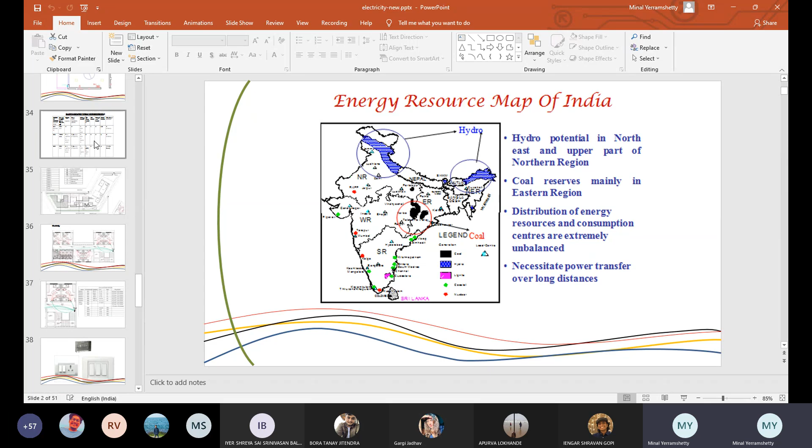So what will you do? You will mention the light as per the... can you see my screen? One minute, yes, one minute, I'll directly go to the plan. And the plan is this. Can you see the plan now? Yeah, I'll go full screen.

Okay, yeah, so you see this? What all things are they showing? Now see here, here he hasn't given any name. Now how will you tell that guy that I don't want L3?

He will say which L3 is it, there's no name here. By something, you want to break the pattern and go some different way, and you just call up your electrical guy. You're sitting in your office and you call him up and say remove L3. Where is L3? I don't know.

So A is the light's position. B is the naming of the light. For the naming, I will probably use... one second, let me go into presenter mode so I can use my pen. My control button is gone.

So if there are tube lights, I will say T1, or TB1 also. If you use LED, you can write L1, L2, L3. If you are using bulbs, you would say B1, B2, B3. If you are using CFL, you can say C1, C2, C3. If you are using sodium halogen, you can say SH1, 2, 3, 4, 5, whatever. If you are using mercury vapor, say M1, M2, M3. This is how you would differentiate.

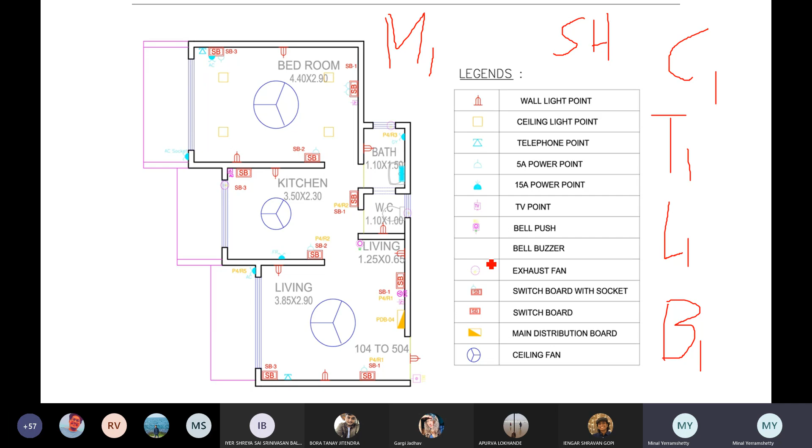It automatically makes sense to you, but does the other person understand what is L, what is C, what is T? He doesn't know, because every architect has a different language.

So what you need to do is make a legend and write it down. L1 is LED, and in LED you get a thousand types of lights now. Some of you can use a cluster, some can use just single points, some can use a cluster of 5, someone will say 7, someone will say 9. I don't know, you have to specify. So just saying LED does not work - it needs the specification, like B1 LED, whatever 40 watt, 60 watt, 100 watt, with specification.

So that's what I'm saying - if you look at an electrical sheet, it is only legends. Whatever language you speak, it is only legend. So one was the position of the light, second was the naming of the light, third one is the dimension of the light.

So how will you dimension it? You will make the center line of this light, and you will give me y, and you will give me x. This is how you will dimension.

Now suppose this is in the center of the wall. If this was on the ground, it's easy for me to mark it out - I can just measure it with a tape. But imagine, now you are talking about the ceiling. The guy is on a stool, he doesn't fly around like that. He will have to move his stool here and there and everywhere, so it's very difficult, tedious and tiresome. Their hands literally hurt - they complain about that.

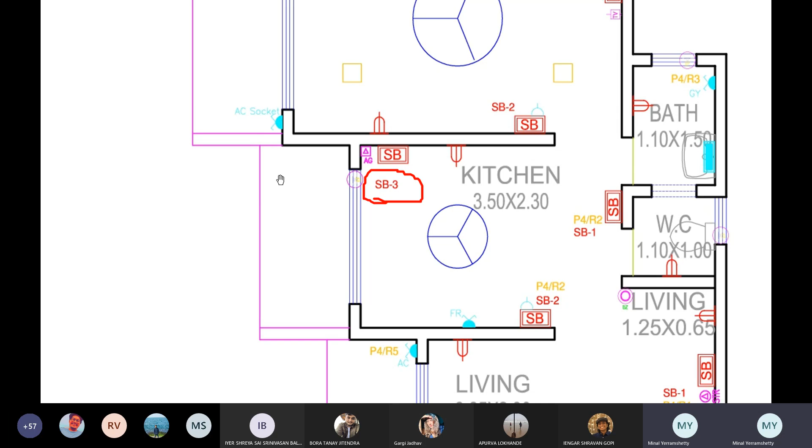So this means you will have to show me SB1, SB2, SB3. You will have to show MDB in your case, since it's institutional - MDB will be in your meter room, the main distribution board, from where the lines will be taken. And since it's an institution, you will have 2 DBs - distribution boards. Now, just as you take care with water lines, you will see to it that the distribution board lines are handled properly.

We will try to put UG and OHT together so that my pipelines become fewer, for various reasons, okay? I don't want to waste electricity or have time lag or whatever. Similarly, I will try to do the same thing in electricity, and we all know the longer the run of electricity, the more the chances it will get heated up.

And that's where your fuse and all your protective gears will come into the picture. So the best part is keep the minimum run. So if your DB is here, the run should be minimum. That's how even he will plan it.

Imagine a person will take the wiring like this, and this way. If the point is here, obviously this was the only option. But if he has to go here, and from here if I take it like this, that will be far shorter than going the other way. Believe me guys, they will do like this for various reasons. He will charge you for the shorter route, and he will actually put it shorter, but he will charge you as if it was the longer path.

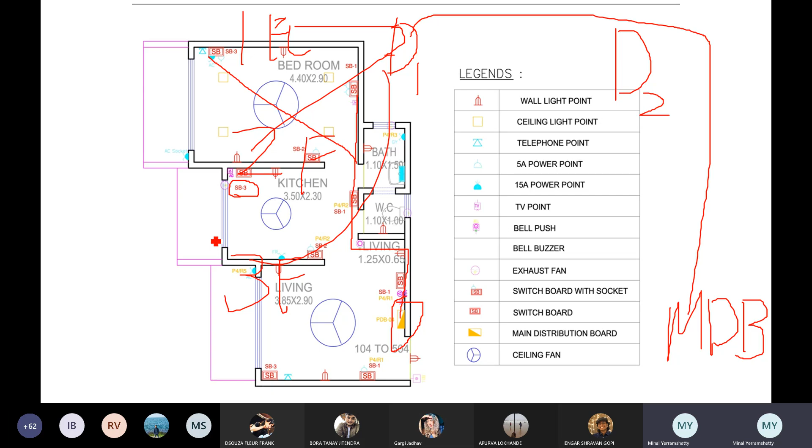So ideally, if I have D1, D2, I will give one like this, one like this. And if there is a third floor, then I'll give one like this. That's how I distribute my electricity, just to protect my wires from heating up. Longer the run, higher the heat. Simple—that's how I increase the voltage.

But can I do the increased voltage within a house? No way. I don't have that possibility. I need a substation for that, which we don't have in a house or an institution, right?

So when we do high-rise building electricity in the final year, there we will study why high tension cables are brought into the site, why you need a transformer, why you need a substation or a generator facility, and then how the entire thing works. We'll cover that in the next semester when we do the high-rise advanced building services.

So this is fine, okay? So this is all done now. Now that guy doesn't know what this means, okay?

Whatever symbols you have used for the light, okay, so the legend of the symbols will also be required. So the easiest way is you can put another line here and say L1 and use different symbols—L1 is this, C1 is this, F1 is this, whatever it is. That way you can minimize the number of legends that you have.

This could be another way of doing it, or best is you give another table which lists all the names—these are the symbols, these are the names, okay? That way two legends are formed, right? The third dimension becomes D. E is the distance of how you place the SB on the wall—where do you put it, right? And I already explained that in the lecture.

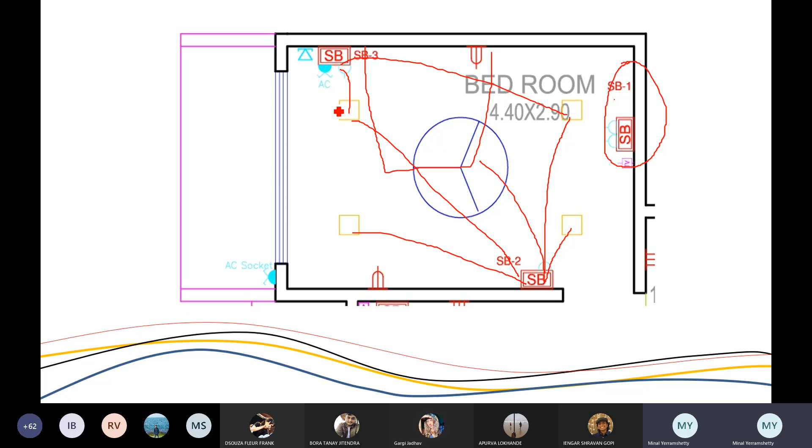1 into 2-way, and 2-way means that this plan is also connected. So when the person wants, he's sitting here or maybe watching or sitting in an armchair, we don't know where the bed is exactly - here or here - because there is nothing shown here. Now suppose the bed is on this side because here there's a 1-way switch and a 2-way switch. Suppose the bed is like this, with this here. While sleeping, he can put it off and the things can go out. So something like this he must have thought about when he suggested all this.

So that's how, again, there are 5 ampere points in the SB. But he has not shown either one 5 ampere point. You can see faint blue line.

Another thing I would like to point out is electricity by itself is very tiny, so when you do the drawings they are exaggerated. We definitely want to show that the agenda of the drawing is not the walls and the beams and everything. The agenda of the drawing is to show those tiny switchboards, those tiny symbols that you have done, but do the symbols in a way that they stand out.

Again, yes. Sorry, I just want to ask - so in our switchboards for our auditoriums, we'll have the lobby and we'll have the auditorium, right? Yeah, so lobby will have one centralized.

You can have only auditorium, or you can do both. If you are interested, you can do the whole auditorium. But in that, either case, it's an institutional space, so it's not like we leave the switchboard out for the public to access, right? Yes, exactly. Lighting of the lobby will probably be in the manager's office, and then the ticket counter and the kitchen will have their own sort of switchboards. Exactly, and the audi's control room will have it too, right?

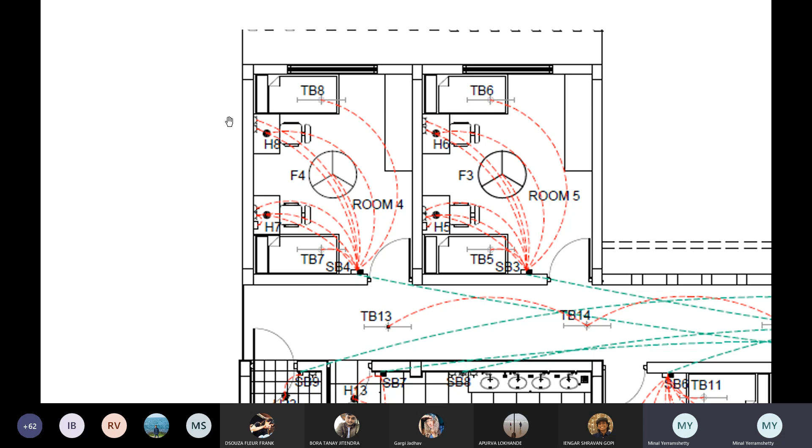Ideally, so I'll show you the next plan. Now look here, this is actually external. I want to show you this plan. I'll zoom in on this area. This is actually how it is to be shown, not the previous one - see the naming of TB7, H7, F4, TB8, room 4. The table is not in this one, one second - I think the table is in the next one, yeah. So then he has done room 1, then he has zoomed in, just to give this table. So look at the way the person has taken the effort to make it understand to the faculty.

Similarly, you will have to do it to your contractor. This was at a larger level where it was difficult for everyone to see and read, because imagine this is one sheet. So then what he did was he had taken this and taken out only that area, and he has actually taken room 1. So room 1 is here, let's zoom in there.

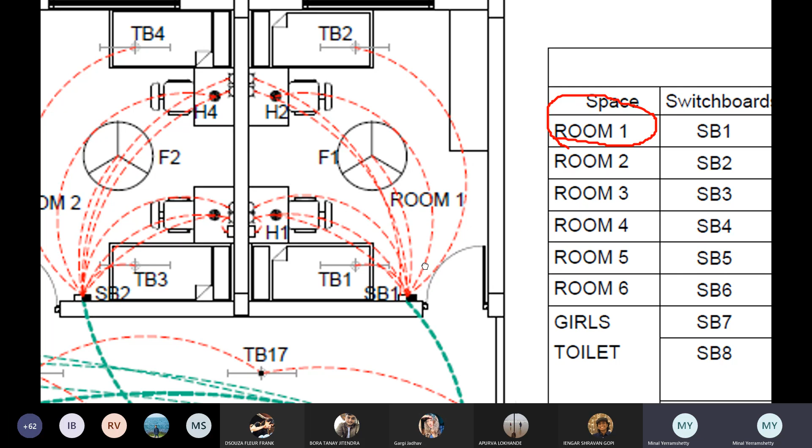Now in room 1, see what is there, TB2. TB2 is connected to SB1. TB1 is connected to SB1. So what he's saying here is, see tube lights, switchboard. He has given tube lights, CFLs, fans, plug points.

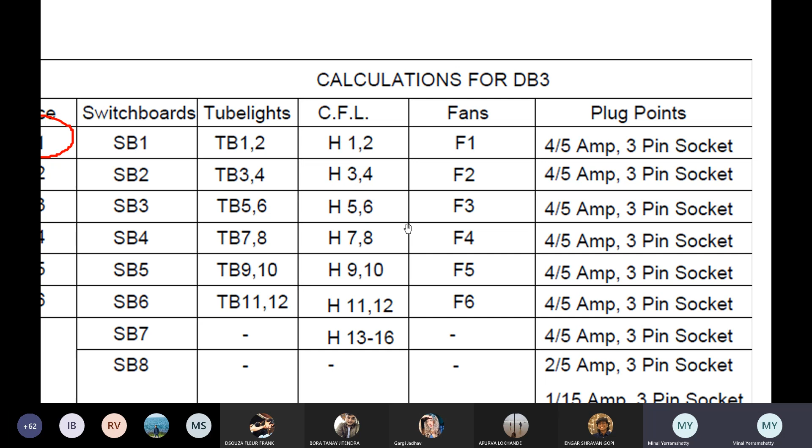Suppose you have 3 kinds of light, you will make one more table. Now why do I do this? What is the need? I can say, in this lights, I can make this, right here TB1, CFL1, switchboard mein hai, SB1 ko ye sare connected.

The problem is, guys, when the project is very large, even if it is a small interior project, say about a 3-bedroom hall kitchen interior, you will have to give a budget to your client, or something that he can order, because either you are ordering, or probably your contractor is ordering. You don't know who is doing that. Whoever is doing it, you have to make their life easy.

So if you do segregation like this, it is easy for me to place order. How many TB will come, 1 2 3 4 5 6, both rooms need 6, and if there are repeated rooms, multiply one room by this and I'm done. So that's how, actually not 6, 1 2 3 4 5 6, so it's 12, so I will have 12 TB in all this area.

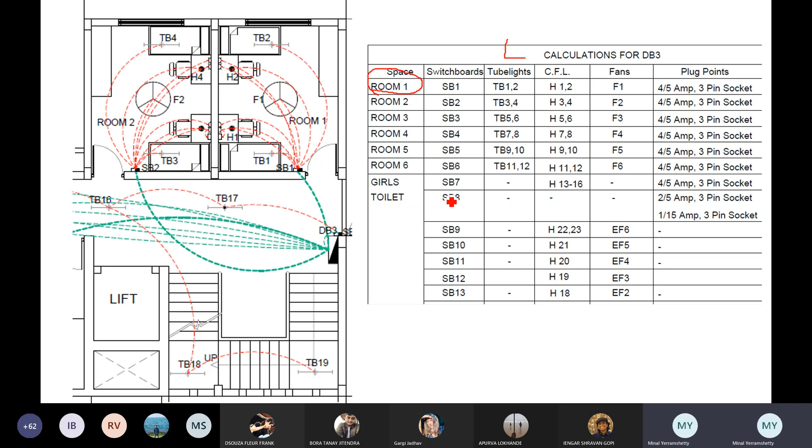Easy to calculate the number, and for the order, just say send 12 tube lights. Send this much CFL, send this much fans. Now look at fan also, here he has not given any specification. That's why I asked you to make a specification here.

In this I asked you that another table will come where you will specify everything. So when I say F1, you will write 3 feet dia, whatever the fan's other specifications are, all that, the color, the texture, maybe you say white, ceiling fan, whichever brand is popular now, Sachin Tendulkar and Dhoni endorse it, so Bajaj or whatever. So you name that and finish it off, and take the specification from that catalog and finish it off.

So this is F1. But your F2 is in the kitchen, suppose. Now F2 is in the kitchen and that is small because your kitchen is small, and this size and that size are different. Now if F2 is small then you will have to mention here that this is only 2 feet, its diameter is just 2 feet. So you will have to mention this. So everything that is different you will have to mention.

Now say tube lights TB1, T1 and T2, but both are different. They are both tube lights but they are both different. In what sense? One is 4 feet, this is 4 feet, and T1 is only 2 feet. This is white light, this is yellow light. So who will tell me this? So when I have to place the order, how will I place the order?

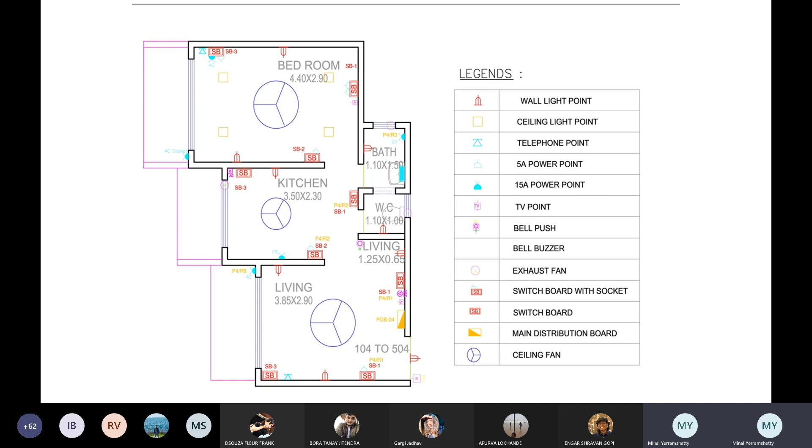It's fun also. It's really fun when you see your project coming up. It's like a baby growing in front of you. So, any questions, guys? Then I can go ahead because now it's almost done.

The last thing you have to do is the site drawing. Look at what this student did, okay? This was my very dear student, Shwetank Maheshwari. He's still in touch with me, amazing guy. His drawings were always done 2 days before the submissions, and then for 2 days he would help other people. He was really good at time management.

So if I zoom this, okay, see this. Now where there is a congregation, the lights are shown very light, okay. So obviously there are problems with the representation. That's what I said, the agenda of the drawing is to exaggerate it. Nothing in this is to scale, only the plan is to scale.

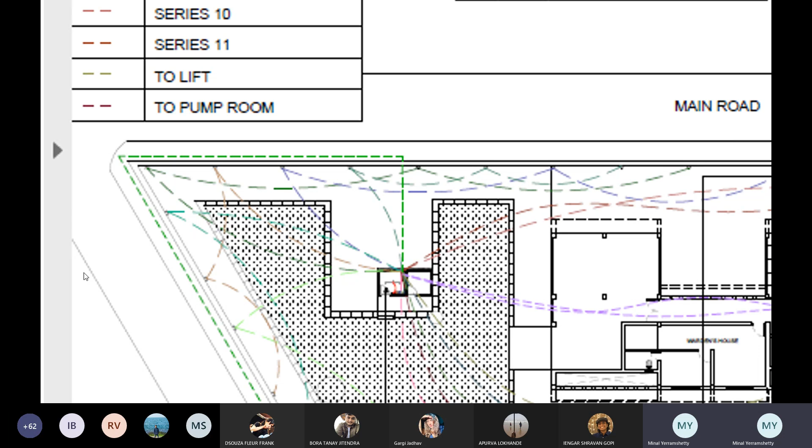If you show the lights like this lightly, how will the lights even be visible? Instead, if I show my light like this in a very bold color, if I show something like this, and then mention L1 because it is LED, won't that be seen more clearly? Similarly I will make this, and that's how I will be able to very boldly see the lights, the distance between the lights, the nomenclature of the light, and the connection of the light.

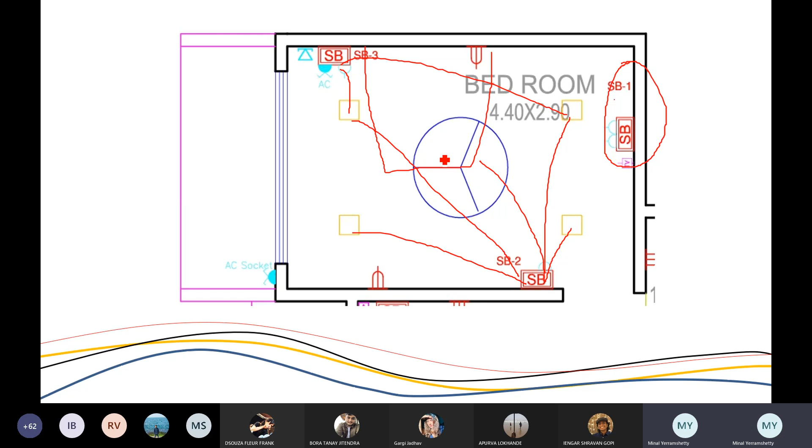Now why should the connection of the site light be so important compared to a normal room? The room is small, you saw room 1, right? You saw that tiny room. Connections really don't matter there. But when I'm talking about the site...

When I'm talking about the site, you can see the distance. This is a hostel, I think this was the hostel area. That's why they have room 1 and 2 and a common toilet and everything, which you saw in the previous plan. So this was the hostel area, with the girls and boys hostel separate, and there were 3 floors and so on.

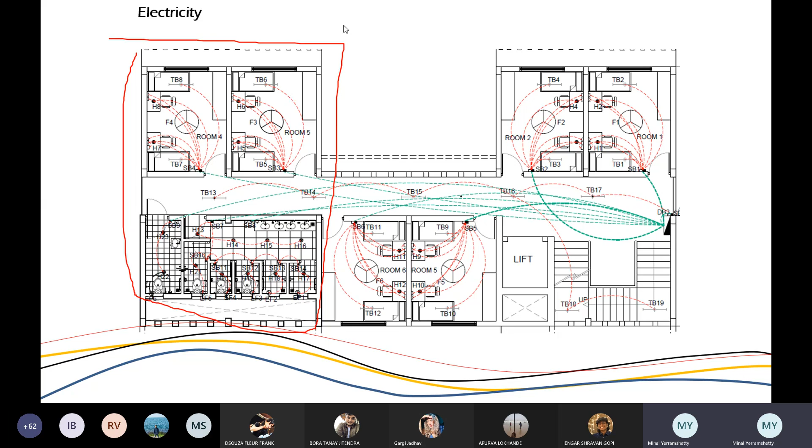Simple, it became a bit of spoon feeding, but anyway. Got it? Any other questions? This is how it is - individual electric rooms where you do this kind of thing. And these are the modules. I think most of you understood, but this is how the modules are planned.

Now any regulator - okay, I'll change the color. Your regulator, your plug, whether it is 15 or 5, doesn't matter. Regulator and plug are always two modules.

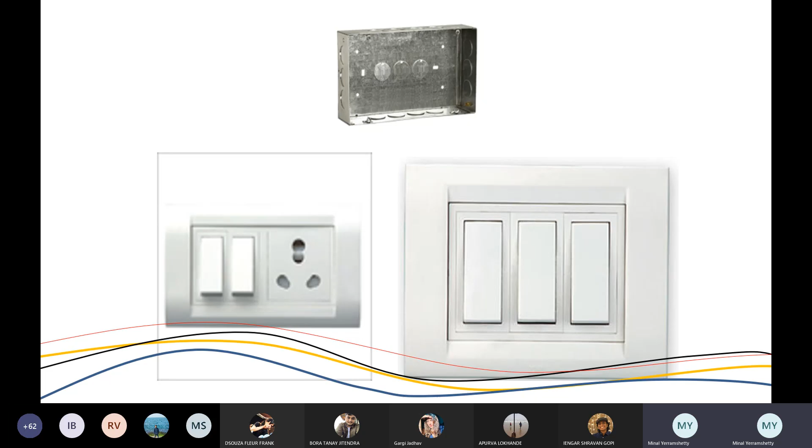Is that it? Yes, I had a doubt regarding the MDBs. Yes. So is it fine that if I have my main distribution board at a far off space and then I divide it into sub distribution boards according to my areas? Yes, that's how you're supposed to do it.

Like it's on my first floor, like the MDB can be there on the first floor. Yeah, it could be there. It could be there, it could be in the meter room as well, doesn't matter, it can be anywhere. But remember, at the start of the large cable, there has to be the fuse. But that you don't have to worry about, that you don't have to show.

As I'm telling you, this is just a theory. But obviously your guy will do it. But it is important for me to protect the line originating from wherever that fixture is. So origination is my bus bar chamber, right? Now from the bus bar, when it originates, it goes to the meter, and from the meter it goes to the fuse, and then it is taken to the DB. The fuse is never put at the end, it is always put at the start.

So but guys, I'm just telling this as a theory. You don't have to show the positions of the fuse and all that, no, that's not your job. The electrical guy will do it. But if he is making a mistake and if he's eliminating it and cutting cost at your cost, then you should be aware of it.

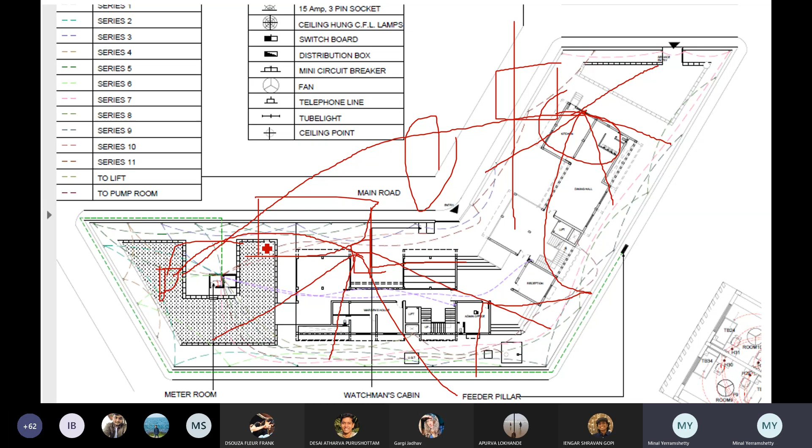And from the DB, the line is going to the 5th year studio, your computer lab, AV room, 4th year studio. From here it goes to the back portion of the library - the library has so many points - to the staff room and to the office. Got it? So one distribution is done by one distribution box, the other wing is distributed by another distribution box. Got it? That is how the distribution is done at KRVIA.

So we don't have a separate distribution box for each floor? Yeah, for each floor, yes. The same thing happens at the second floor, where you have a toilet and a DB here. At the master's level you have a toilet and a DB too. So the same thing happens at the second floor - it has to happen floor wise.

But how does it work on a single floor? Many of you will have just one floor, not very long. There you can just have one DB. From that 1 DB, you can take SB1, SB2, SB3, SB4, 5, whatever is needed. Or you can do it in series wise, that also works. So that is how you give supply to all the SBs, and each individual SB, in case of a residential, will supply to say bedroom 1 light, bedroom 2 light, bedroom 3 light, bedroom fan, bedroom TV, and so on.

How big will our meter room have to be in terms of area? If it is just 1 meter, it can be as small as 2 by 2 - as small as that. Even a small nook will work, because there is only 1 meter. Right, nothing else on that except 1 meter, a small bus bar, and that's it. Because even though it's 1 meter, I will need to take lines for this and that.

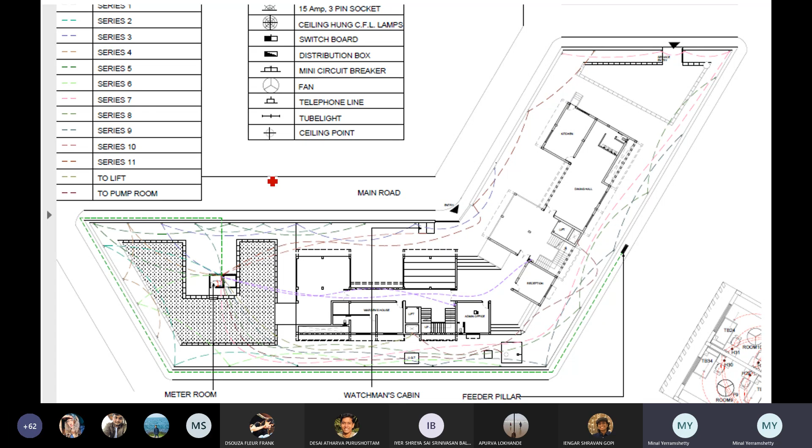Can be done. I had a doubt - can my meter room be on the basement level? It can be, but just remember that basements can flood very easily, even with a little rain. So you need to protect your meter. I'll show you the diagram where they show the meter room.

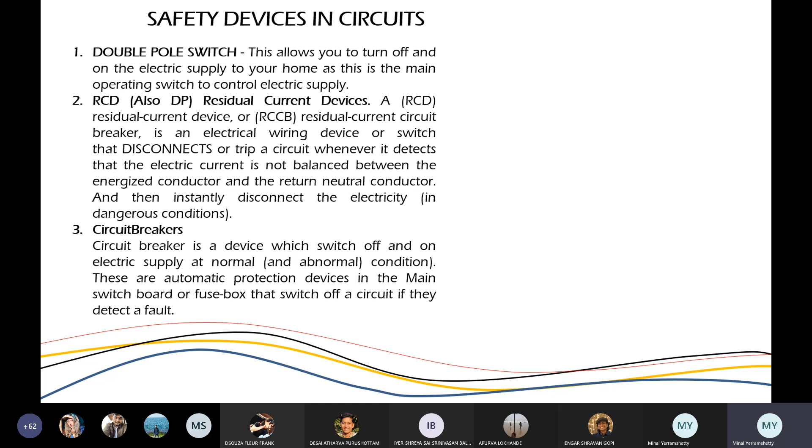So that precaution you will have to take even at the basement. In basements you will really have to raise a high plinth, actually put a meter room on a plinth, give steps to go to the meter room and then take the panel up. So that even if the basement floods, your meter room is not affected, because guys, water is one of the best conductors of electricity.